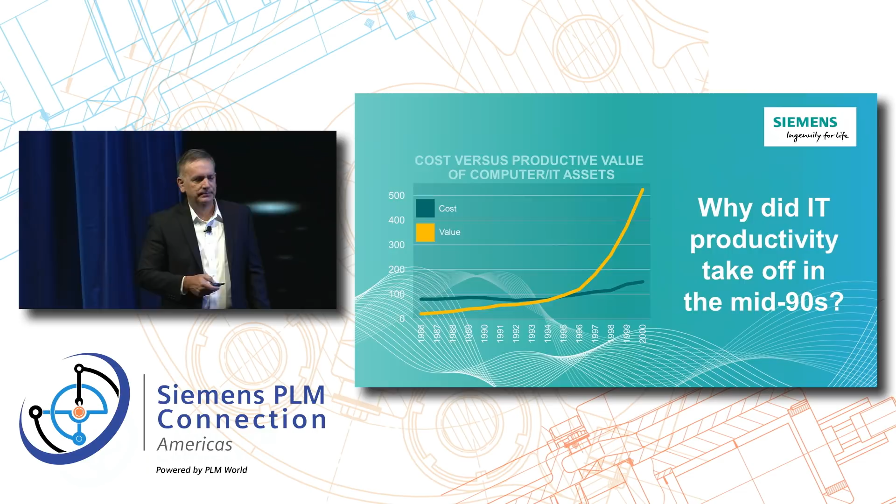We started to see the idea of what it takes to bring this technology to make a business, or make a difference in our business and the way we work. And if you think about it, it's not just computer technology. The same thing was true with electricity. Electricity really didn't take off until we built the power grid. Automobiles - cars really didn't transform in the way we think until we built the highway systems.

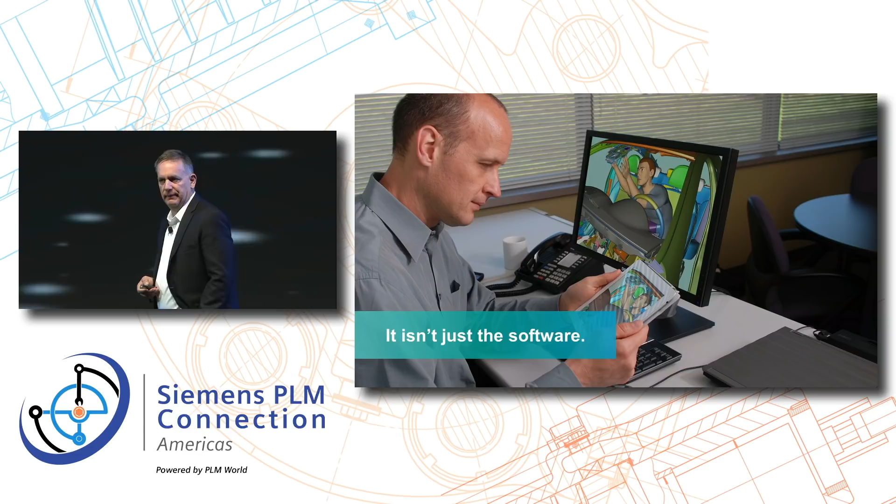So if you think about it, it wasn't just the light bulb, it was also the grid. It wasn't just the car, it was also the roads that make the difference. And I'm here today to say that it's not just the software, it's the integration and what's required to make all of this work. Because you've really got to think about how you put all the pieces together to get the true value out of this.

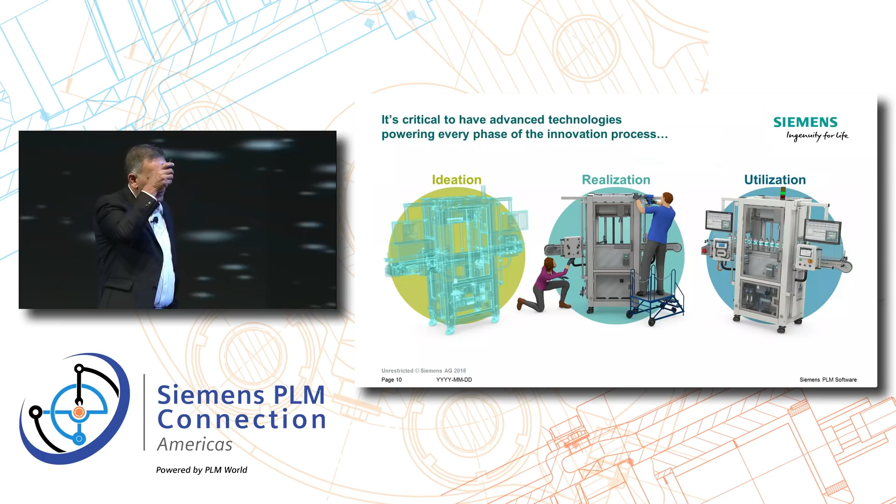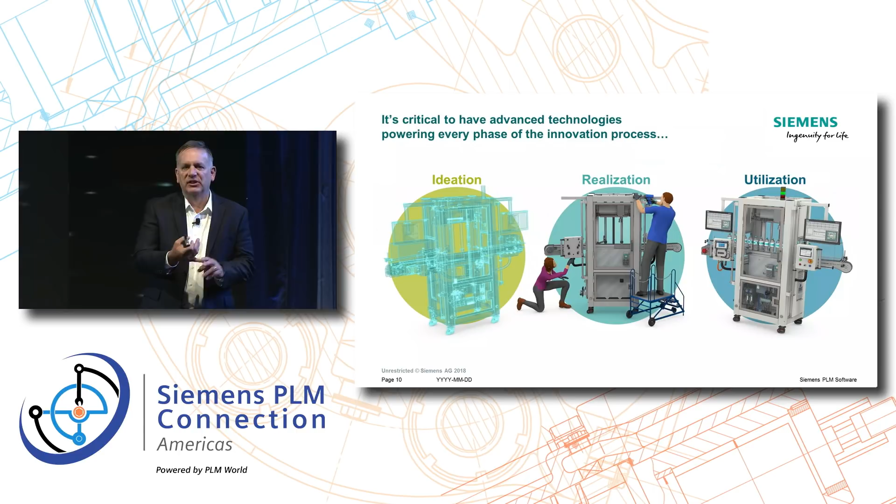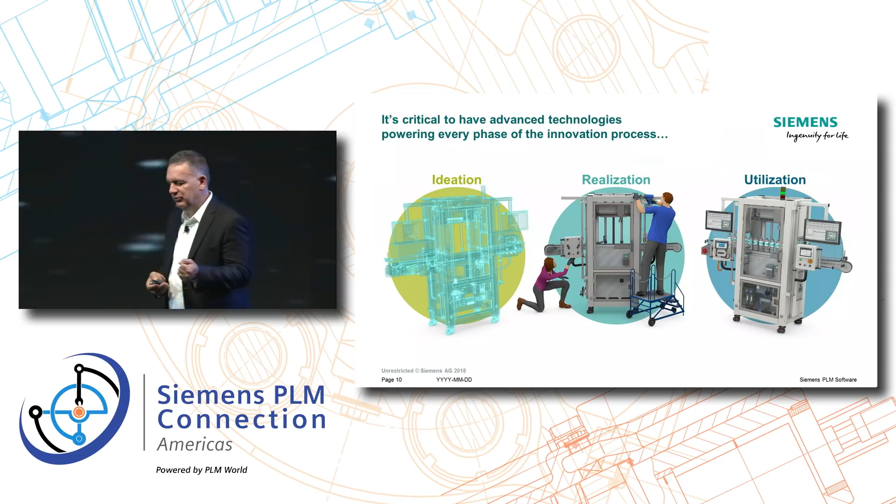And how we bring it together to make a difference in our business. And we believe one of those reasons is it's important to have a platform to build upon. Some of you have seen this before from us. I'll talk about it briefly, about what we describe as the platform. We've got this idea of ideation - it's the upfront phase of what we do, design, innovation, all of those types of things. Realization - you design it, somebody's got to manufacture and build it and produce it. And then we've got a utilization phase, which is the feedback, or how you work with the product that you've developed. And the value of that is when we start to think about putting it together into a single digital thread, and how you integrate these pieces together. This is what we work on so aggressively at Siemens, to make sure we can bring all these pieces together.

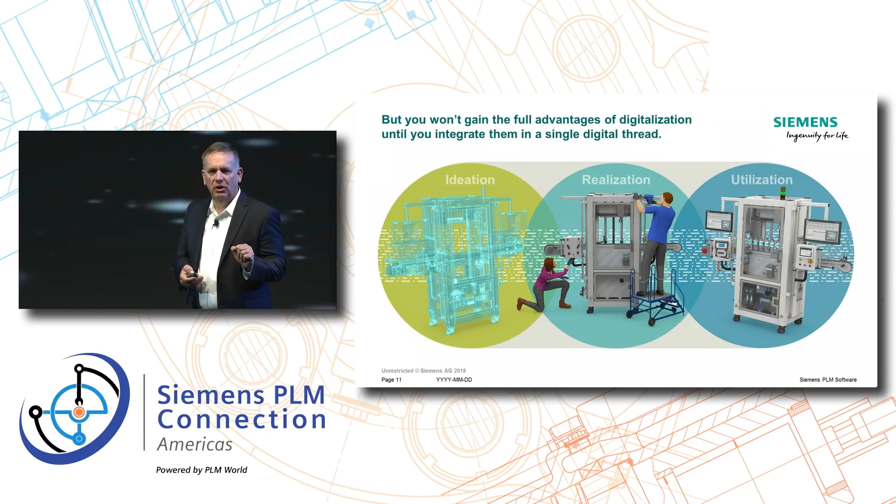Because when we think about it, you've got to be able to represent all three, particularly if you talk about a digital twin. If a digital twin only represents ideation, are you really going to get to where you need to be? Because again, you've got to manufacture these things. You've got to figure out what's happening with the product in the field. How do you use it? And so we think those are extremely important.

But the other part of the digital twin that's very valuable or necessary is to represent the multi-physics of the problem. I've got mechanical design, I've got electrical, I've got software. How do I bring all those pieces together?

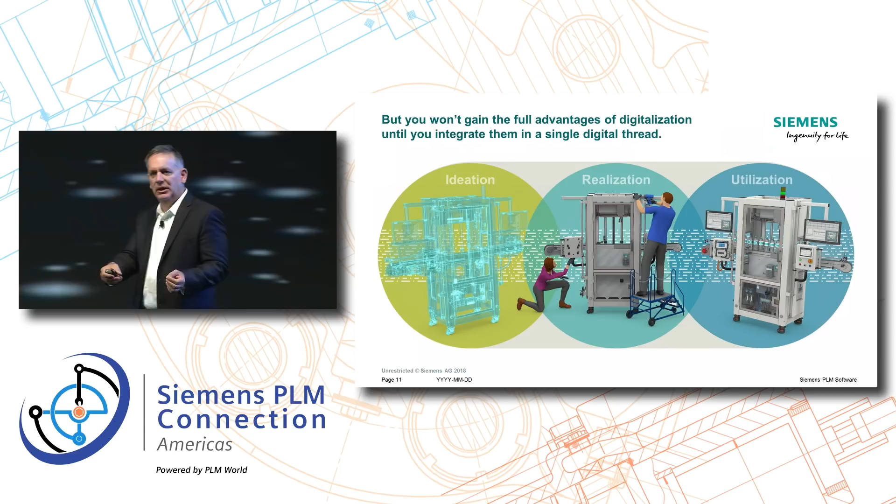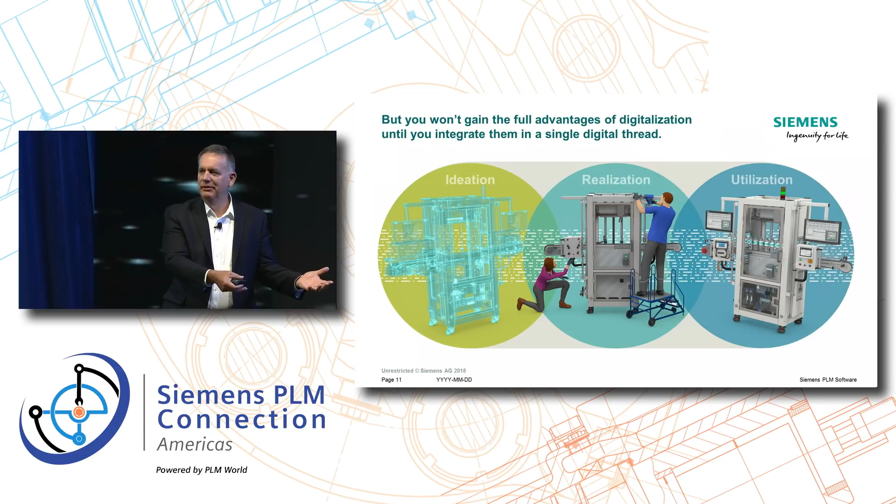Because the value of the digital twin is how closely the virtual world can represent the physical. So how can you possibly represent the physical if you can't even represent electronics in the product? Or if you can't think about how you're going to manufacture it? And so that's why we spend so much time trying to make sure that we've got a comprehensive digital twin.

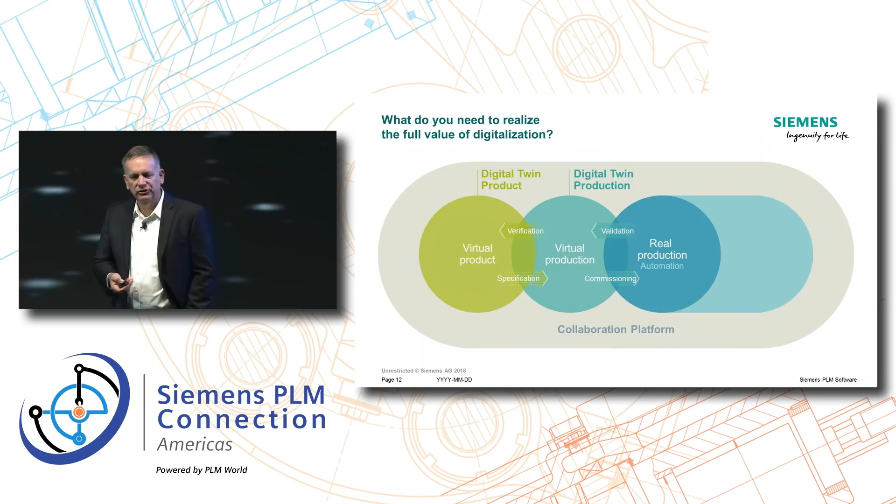And we think about that in a platform where we talk about the virtual product, production, real production, which is the automation running in the factory, and then the real product and the feedback loop back. With the feedback loop, we're saying, look, what do we learn from this product? How do we bring that back into the digital twin and understand what's happening so we can make changes to our design and the way we work as we go forward with our product set?

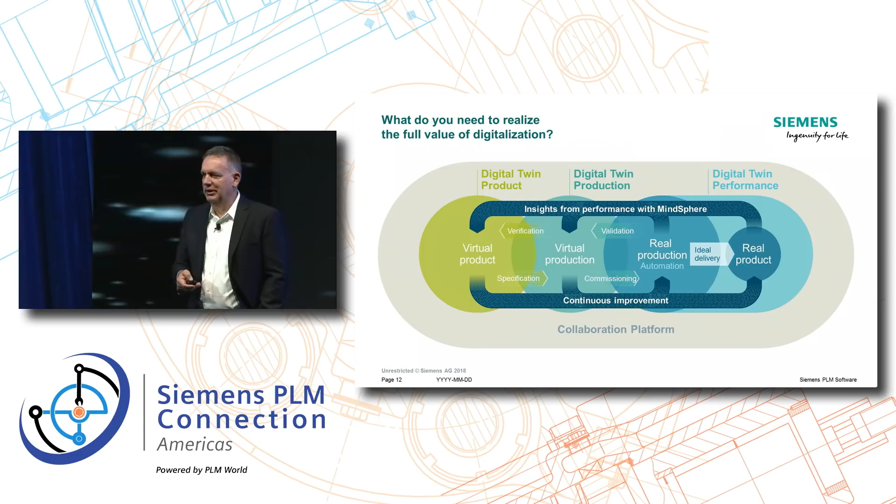So I thought I'd take a moment just to walk you through what we mean when we talk about this idea of an integrated solution. This is one example of where you could be.

Imagine you're in the truck business and you're losing market share. You're losing market share because your truck can't drive the same number of miles on a full tank of gas as the next truck. And so you're spending more time refueling. Marketing's coming back and saying, we've got to do something. Where are we at? And you really don't have time to redesign the entire truck. So you've got to think about how do I leverage the technology that I have today to quickly find a way to respond to this.

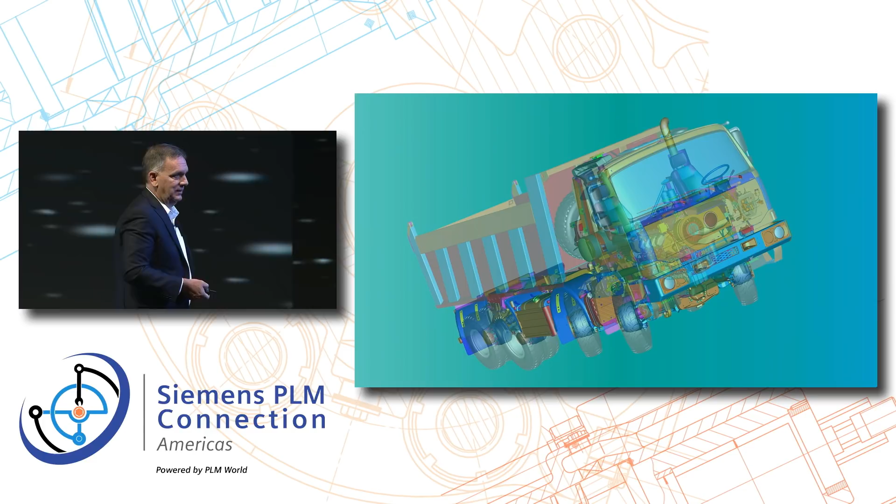So we look at extending the range, we look at our digital twin, and we say, well, what are some of the options I've got? One of the options might be a simple change - just change the size of the fuel tank, right? Because I can drive further because I've got more fuel. But what happens when I do that? Because it's a pretty complex system, right?

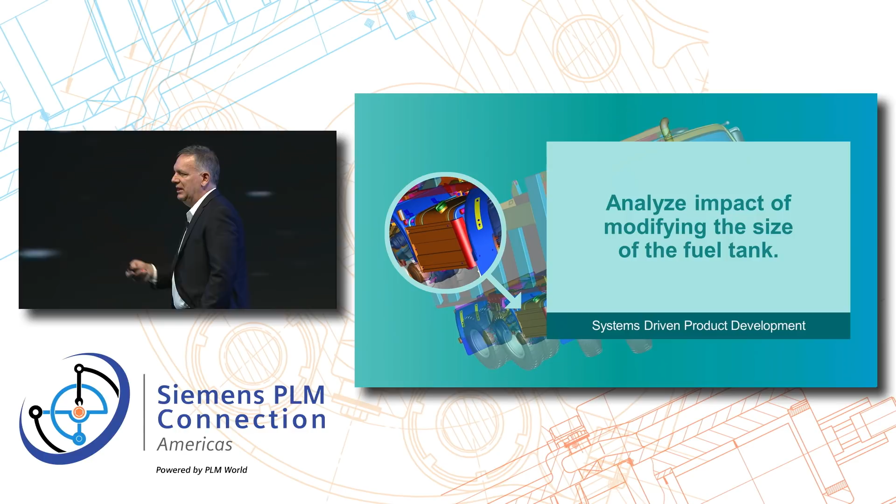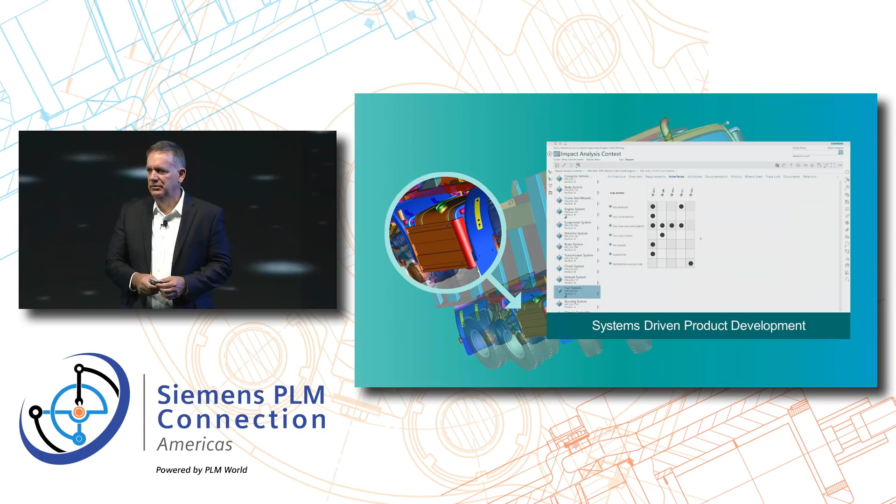If I want to analyze this, and I think about it through a systems-driven product development process, I want to start with that tank and then figure out what's all being impacted by the idea that I want to change this tank. So, in a systems model, I can go identify the tank and find everything associated with this. From this, I understand all the subsystems, the relationships, the requirements, everything associated with this design. So I can immediately understand what impact do I have in making this kind of a change.

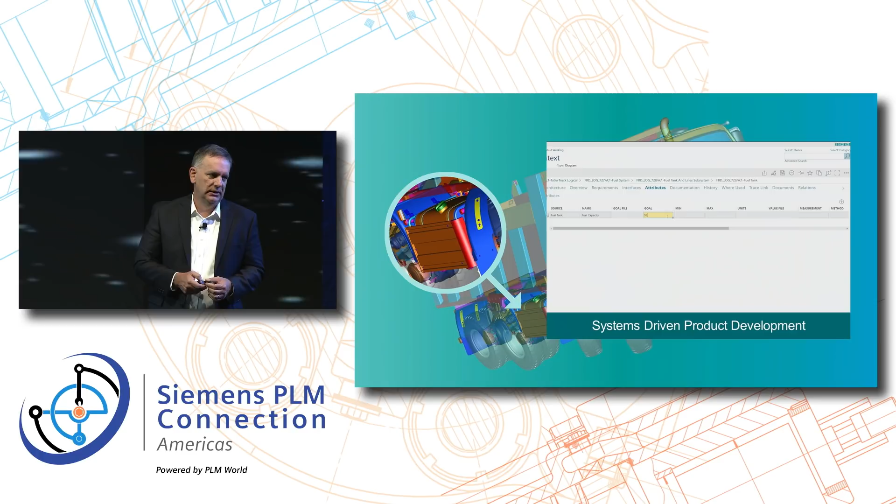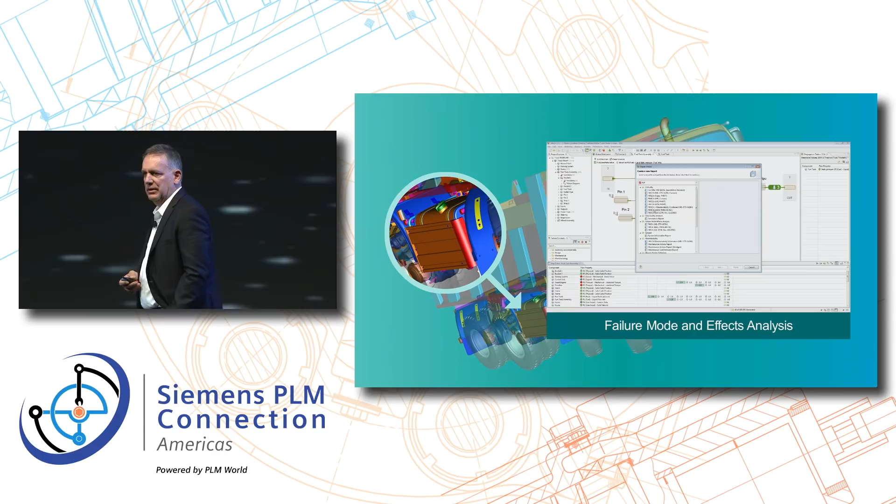And then from that, because I've designed this through a systems model, I can put in a failure mode and effect analysis that kind of takes place automatically. It'll come back and tell me and say, look, based on the systems model you've designed, 9 times out of 10, we're going to predict in advance that your brackets are going to fail because they can't carry the load.

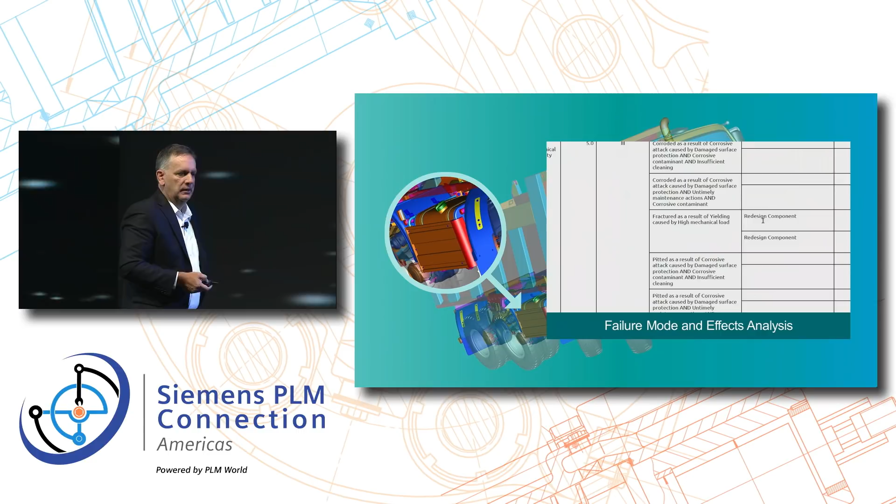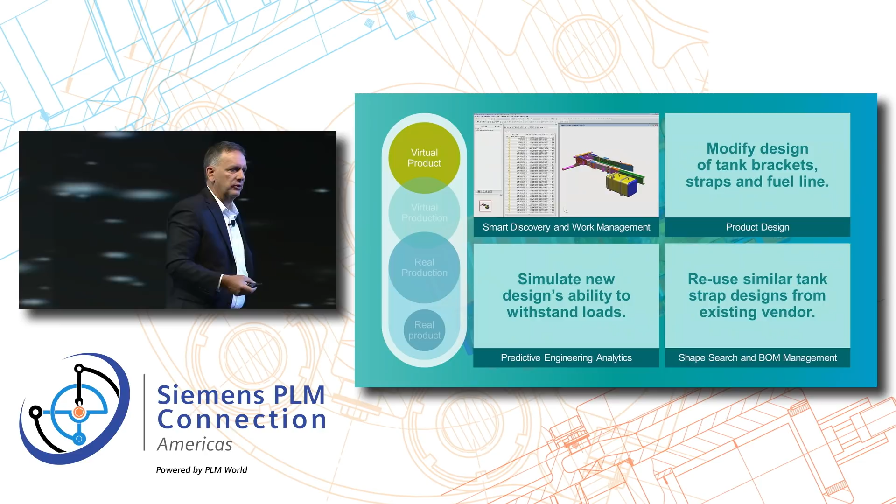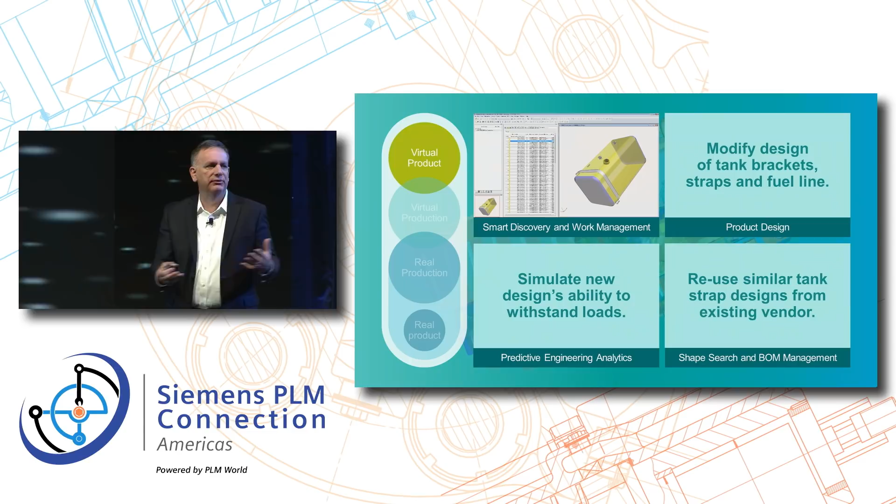From there then, we say, okay, well, what other things can we do? Well, first of all, using smart discovery, I can go in and identify this tank and say, I want to see everything associated with the fuel system, independent of what assemblies they're put in, independently of how everything's organized. I want to see the fuel system. Bring it to me so I can see what's going on. I want to see electrical. I want to see fuel. I want to see anything within a certain range of these components, regardless of how it's been organized in CAD and assemblies and so forth.

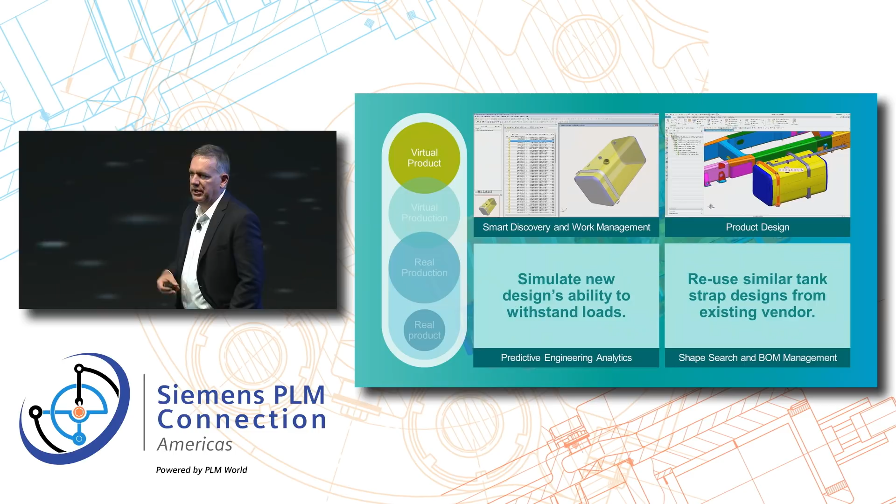And then, of course, I want to be able to do the design. You're going to hear a lot about what we're doing with NX over the next several days, and some of the things we're doing with convergent modeling and so forth that can change the way we think about design. From there, I take it into our CAE tools with Simcenter and really start to understand what kind of problems I might have from an analytical point of view when I change the size of this tank.

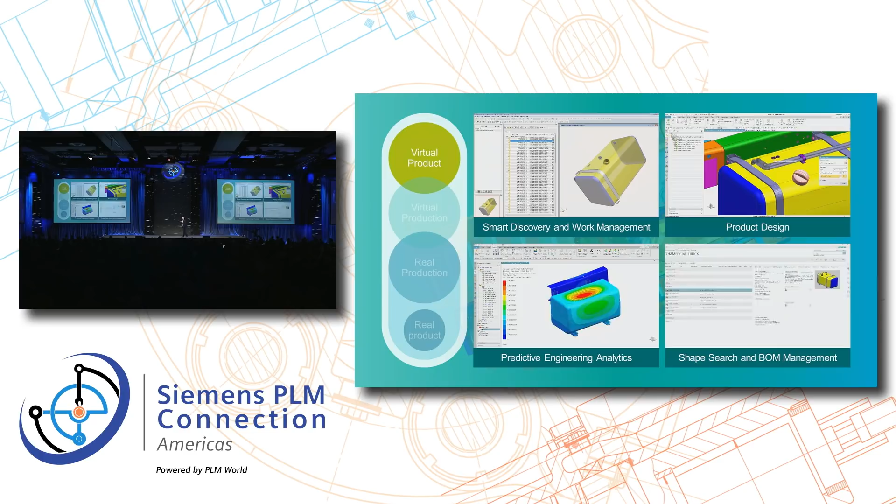I can use shape search to go out and say, well, look, if I've got to design new brackets, maybe I've already got some brackets that exist in the company that I could leverage, and I search by shape and bring them to me.

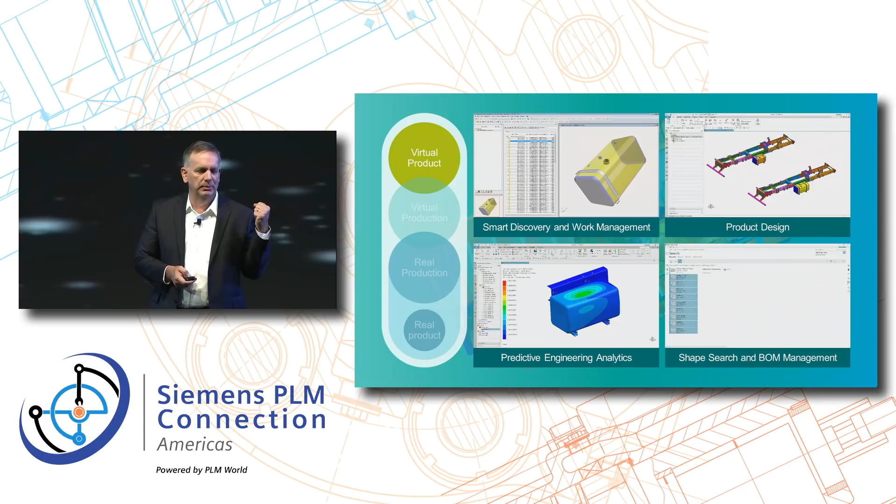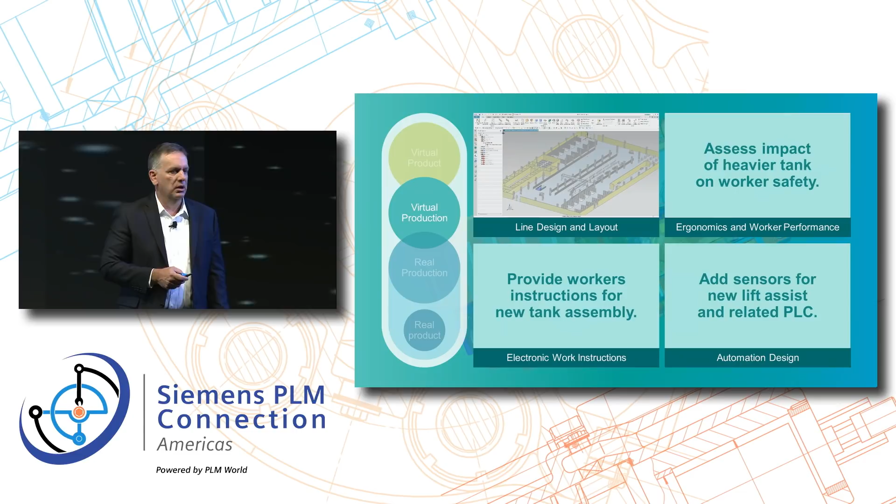If I change the tank, I've got to change the line layout of the factory as to where I'm doing the work, the assembly process. If the tank's heavier, what kind of ergonomic issues am I going to have when I put this together?

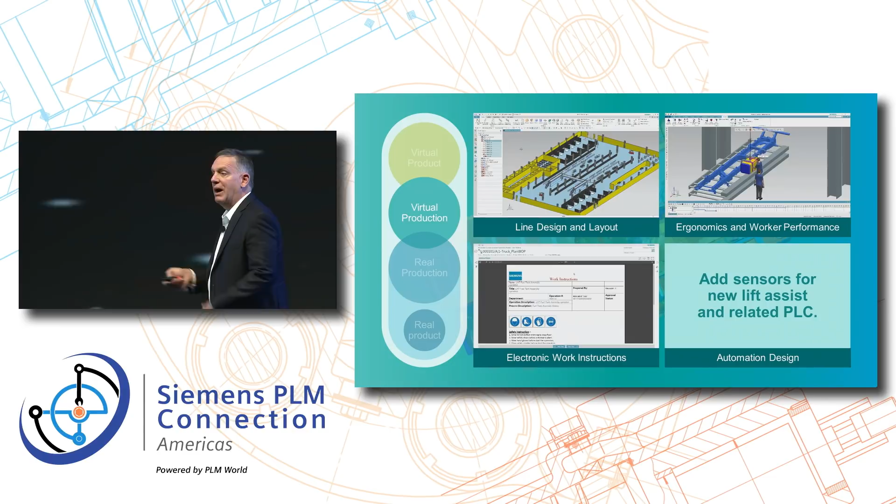From there, I've got to create electronic work instructions or modify the work instructions that are being put in place.

I've got factory automation running the plant. How do I automatically generate the PLC code from the definition of what I've designed for my factory, so I don't have to have this handoff and intervention in between? Automatically generate the PLC code.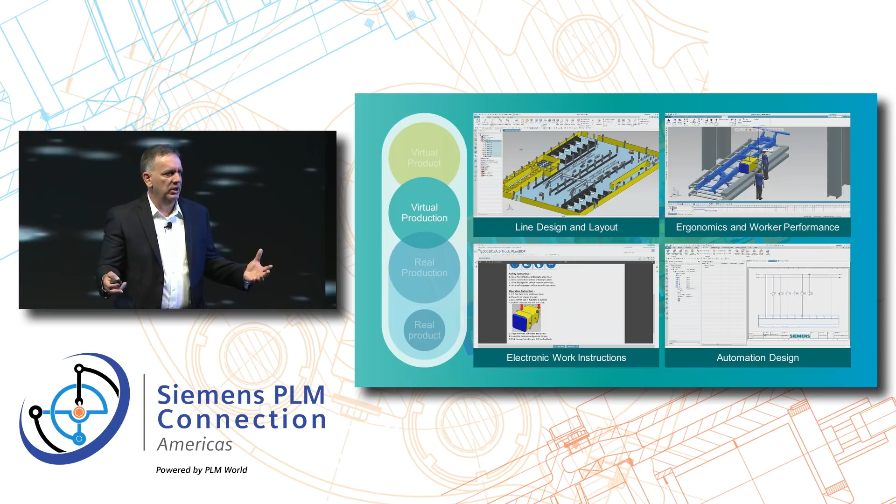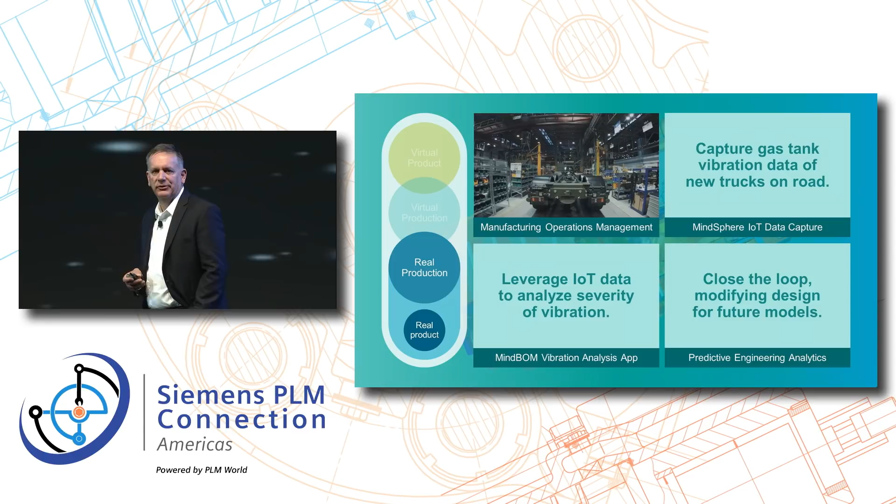And then I go into manufacturing operations management, implementing an MES, manufacturing execution system, to capture this.

Back to IoT with our MindSphere solution. I want to capture data on the prototype of this as I put it together, because maybe I'm starting to see a vibration problem in the tank, and I've got these trucks all over the world in prototype phase.

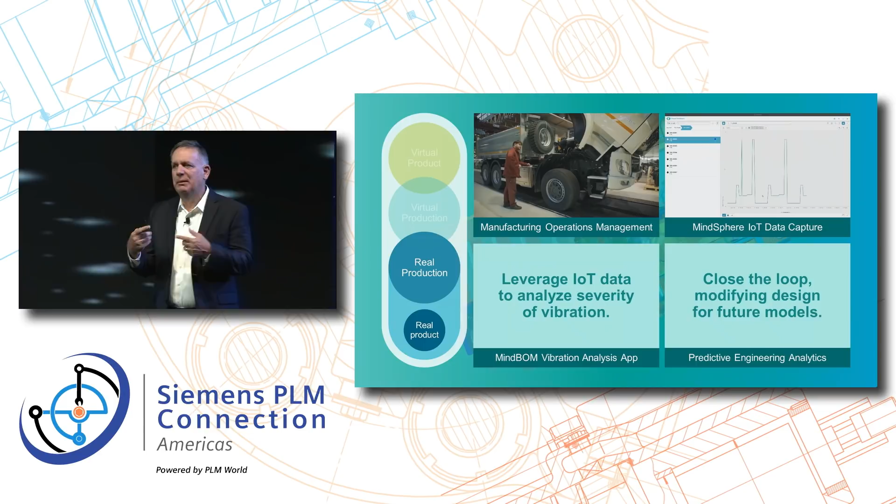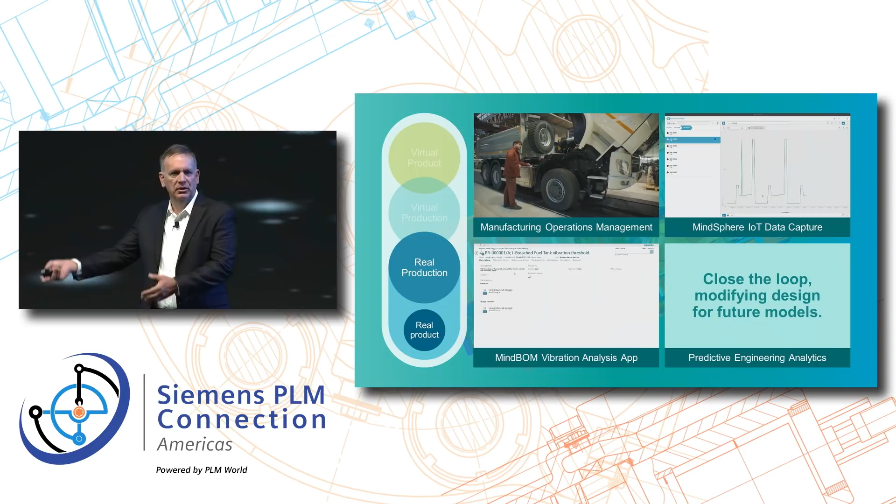I feed it back up, the sensors off of the truck to the cloud, take that data, and I take real data from the truck, load it back into our CAE tools, and actually run CAE against the real data, vibration data, to understand what's going on versus what I predicted and what's really happening with the truck through an IoT feedback loop. And then from there, I can close out the loop even further to start looking at predictive type of issues that I might be seeing when I develop this type of a product.

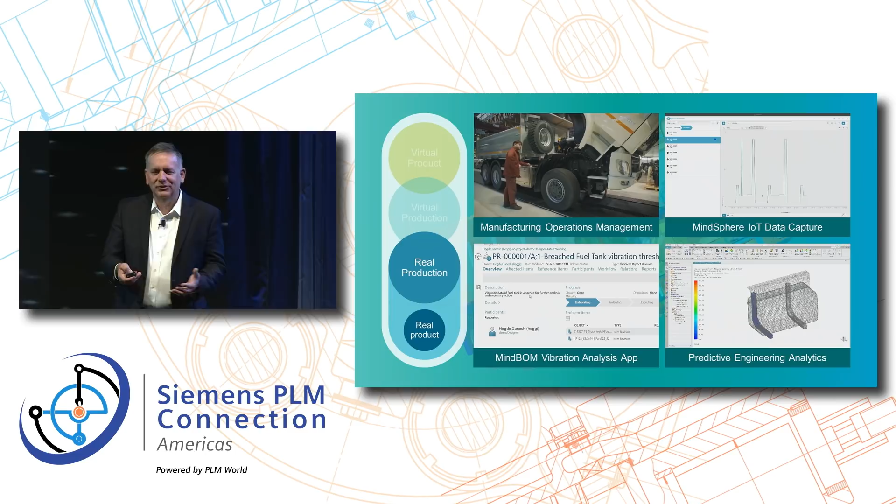So this is a small example of some of the things. We have many areas you could go into as to what an integrated solution looks like. But I'm here today to give you some examples of how customers are already using this technology, and it's making a big difference in the way they go about their design and manufacturing process.

Example here is Bugatti. Bugatti is, if you're not familiar, one of the fastest production cars you can buy today. Very expensive car, by the way. But one of the issues they had was, if you think about a car like this, weight and drag are very, very important to the specifications of this car.

One of the issues they dealt with was redesigning the spoiler on the back end. And the idea was, how do we take out some of the weight? How do we think about aerodynamics and so forth with the design of this product?

So they came to us and they said, look, how can you help us? And so the first thing was looking at what we do with NX, and the idea of specifying requirements to feed into a generative design process, an organic design of a shape.

From there then, if we get that shape, how do we manufacture it? Well, then we looked at what do we do with our additive manufacturing solution, leveraging composites in the design, using what we've been able to provide for some time now within our composite capability.

And then if I want to manufacture this and produce it through 3D printing, what I do with hybrid machining. Hybrid machining is interesting because every DMG Mori machine today that does hybrid machining ships with NX software, because they saw the value of how you could bring all this piece together.

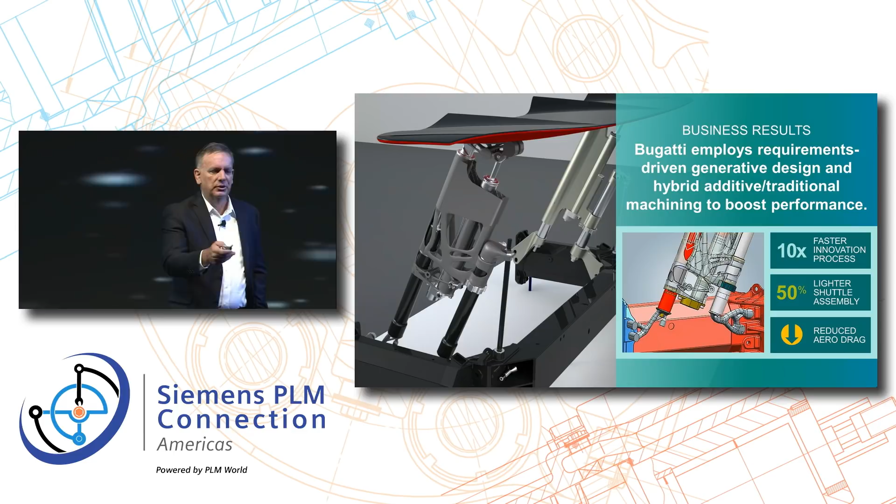If you see the picture on the left, you can see the traditional design of the bracket holding the spoiler up on the right, and then on the left you can see the kind of crazy looking shape. That shape is an organic design, part of it, the bottom half.

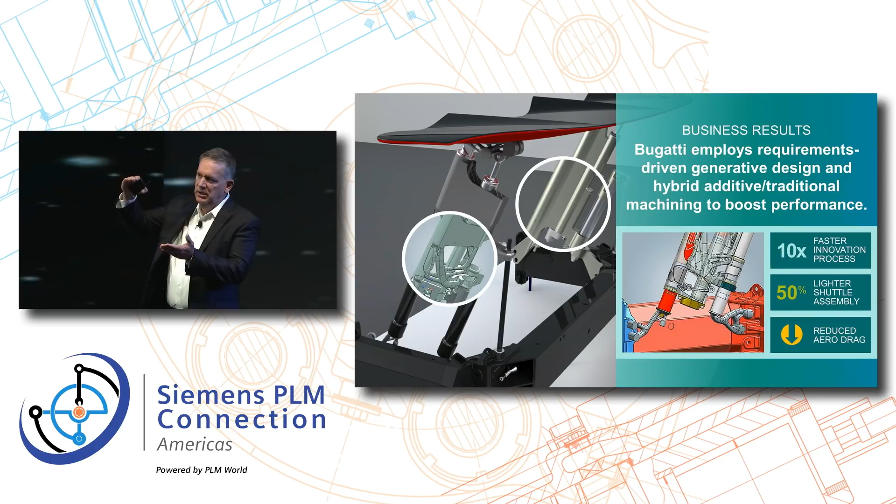The top half that sticks out of the vehicle as it's traveling down the road has very specific aerodynamic concerns that are modeled through our computational fluid dynamics solutions. But they wanted to integrate the idea of faceted geometry through generative design, which you'll hear about a little bit later today, with traditional modeling techniques to be able to design that bracket, something we did very easily with them.

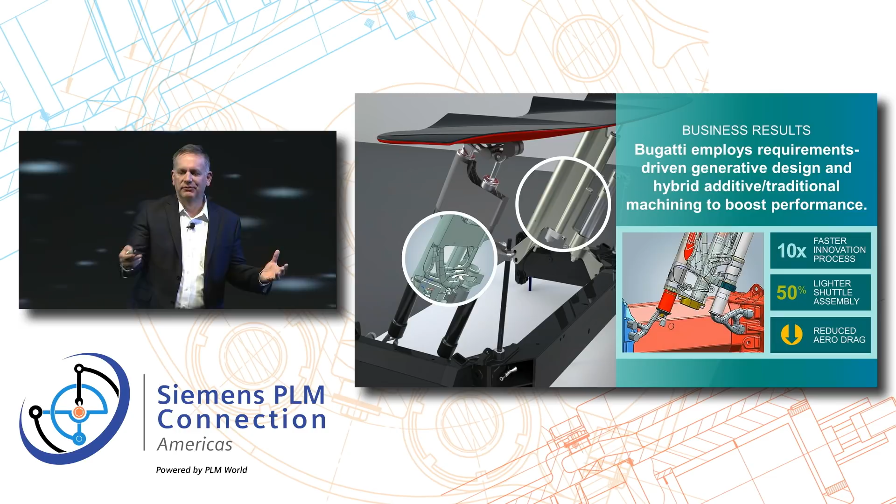And then the lower bracket is true organic design. You see the thing on the right, traditional design. We said, let the system design the software. In organic design, we give the loads, we give the constraints, we give keep out areas, and the software designs a part for us.

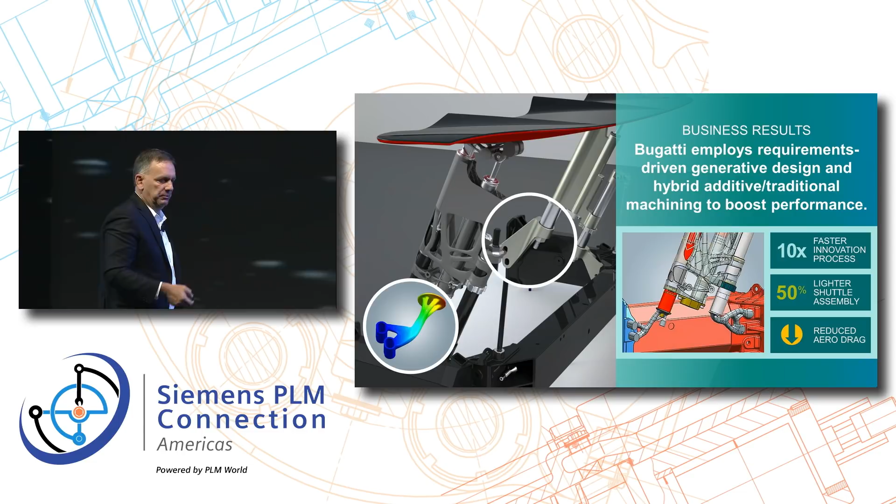And this is what they've leveraged to be able to reduce the weight to produce a solution that's 50% lighter than what they had before in their design process.

Now, think about the transportation business. It's estimated there's over $1.5 trillion in cost inefficiencies in transportation today. And what Hyperloop One is doing is trying to find a way to eliminate that. So it's not just about building the Hyperloop, it's about everything associated with the Hyperloop and how you would think about travel.

But these guys had a challenge. Their challenge was they had one year to come up with the prototype, and they only had 300 people. Because oftentimes when I'm up here talking, we talk about the big companies, lots of dollars, lots of R&D, and so forth. These guys did it with 300 people.

And what they did was they came to us and said, look, we need an integrated solution. We've got to take what we're doing with product design through NX. You've got to help us with computational fluid dynamics, and then how do we build a collaboration tool that we can go quickly with? Because even though we've got 300 people, we've got to do this within one year.

By putting the solution together, they did it in 9 months. 9 months, 300 people to make this solution work, to get the first prototype built. The first prototype was 387 kilometers per hour in test.

Again, you can achieve these types of things not by just throwing a bit of technology, but thinking about how do you put the solution together and how does it make a difference in the way you drive your business.

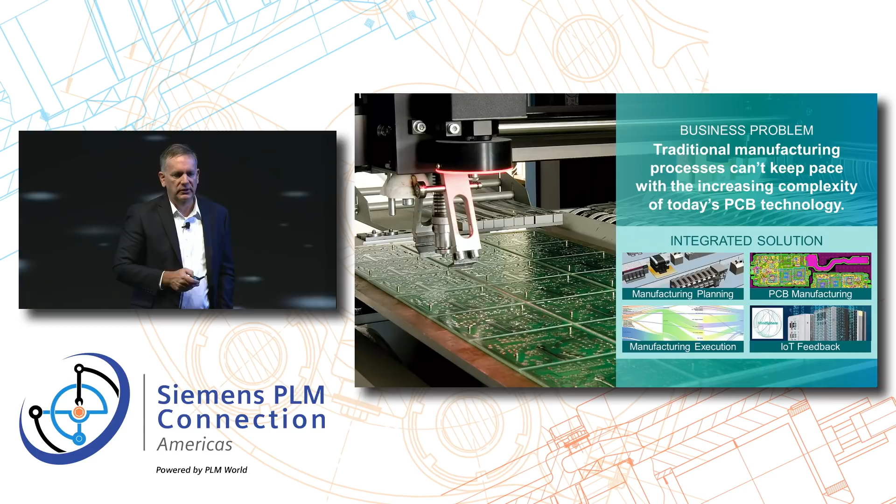But in this particular case, it's really about design for manufacturability. It's how do you think about integrating printed circuit board manufacturing with manufacturing execution systems and IoT to think about how I go about the design of this. And you'll hear more about this later today as well, as to how customers are leveraging this.

What we're seeing is that with the closed loop approach, where we can monitor and understand where we're having failure rates or machine maintenance or other types of things occurring, through IoT we can get a feedback loop and make a tremendous difference with faster setup, just-in-time materials, better vendor selection based on what we're seeing. These are the integration pieces you'll hear about a little bit later.

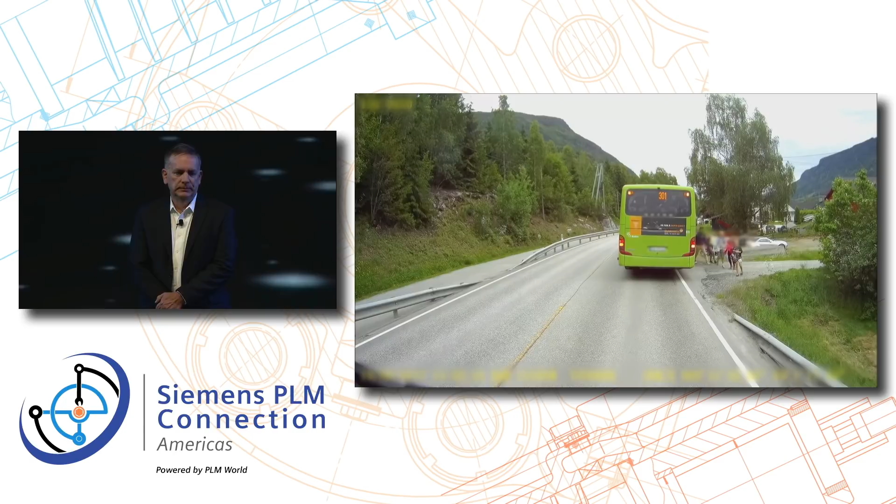Luckily, no one got hurt in that video. The reason no one got hurt is that for 2 years before that, Volvo Trucks was leveraging our PreScan software to make sure that emergency braking system acted and worked the way it was supposed to act. Hear a little bit about Volvo, what they're using.

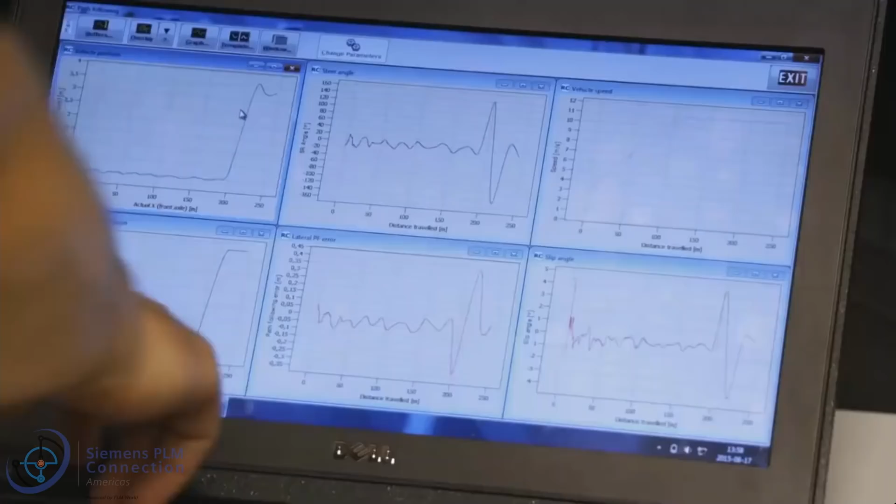As our active safety systems become more advanced, our test methods have to become more advanced too. What we do here is basically create any traffic scenario in the computer, and from the computer we get drive files that we then program our robots in the truck with, so that we can create the exact same scenario on the test track.

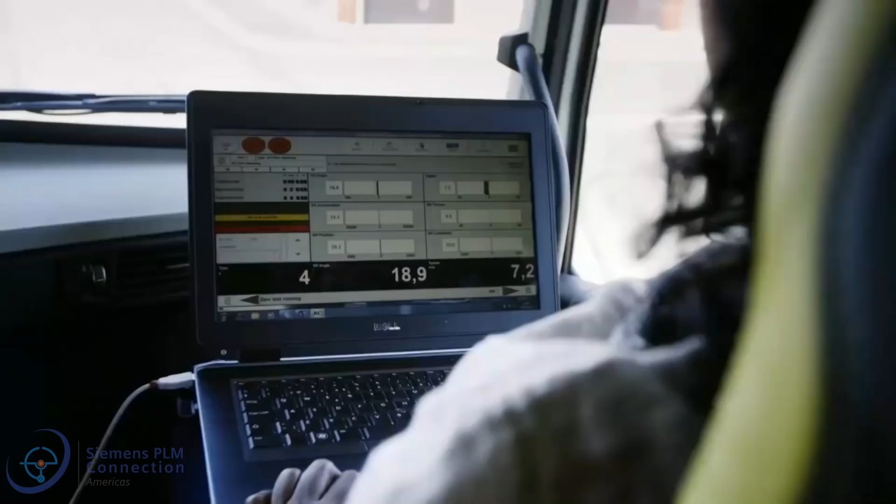The main components of the system are a main computer controlling all the systems, a steering robot, a robot controlling the acceleration pedal and the brake pedal, and a GPS unit that controls the location of the truck.

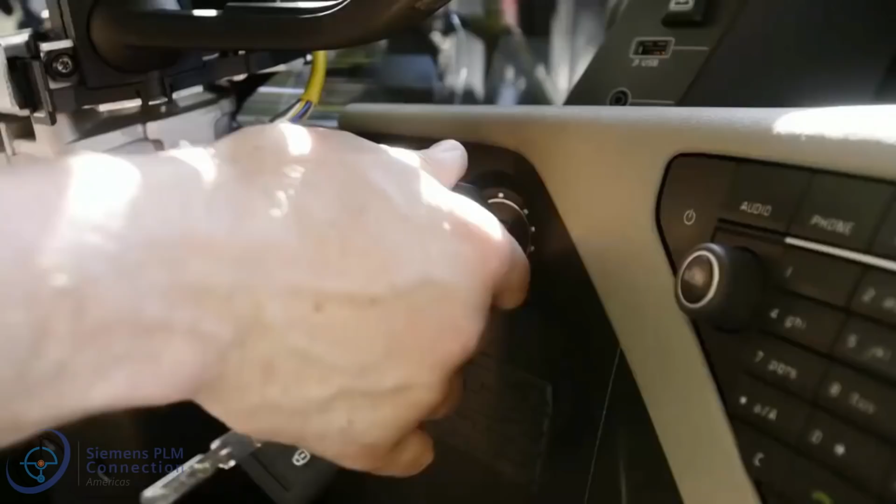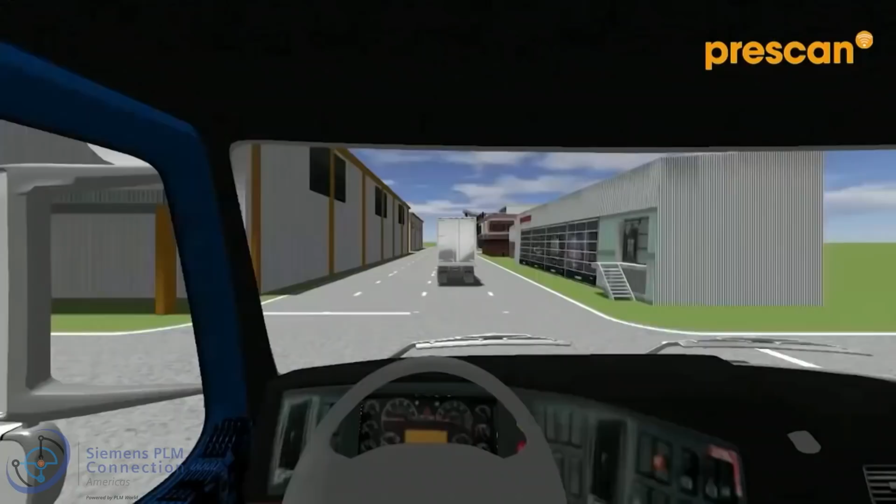Right, I'm here with Robert, so what's the deal now? What's about to happen? What we have done now is programmed the robot in this truck and a truck in front of us to do a scenario where we follow the truck in front of us, and then there will be an obstacle on the road, testing the emergency brake.

And the truck is driving all by itself? I'm not doing anything? No, what you should do is only hold this button here, the dead man grip, that activates the robot. If you release that, the robot will be deactivated. Everything is set, you can start the test.

The test will soon start. The reason why we do this is increased accuracy and repeatability - we can create the exact scenario that we had in the computer on the test track, and repeat the same scenario over and over again with the exact same outcome.

But also, if you want to vary a scenario - for instance change the speed or the distance between the vehicles - this is also very easy to do, because we just change a parameter in the computer file, and then program the robot and run a variation of the same scenario.

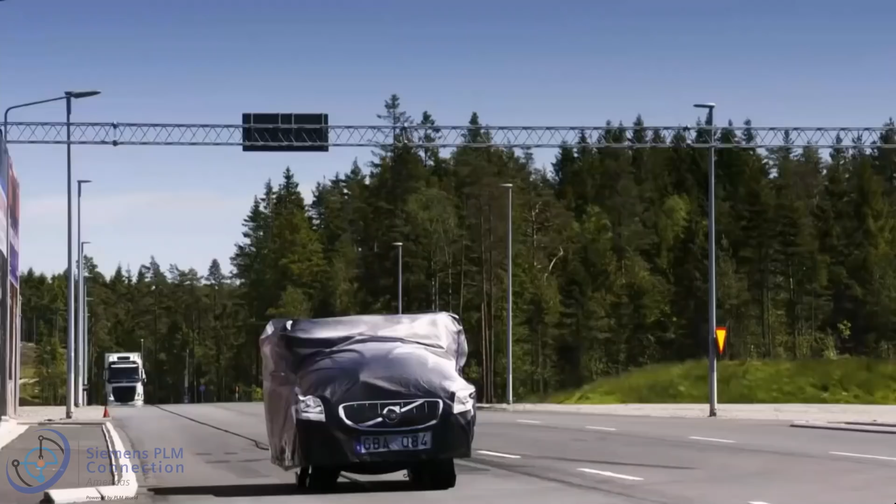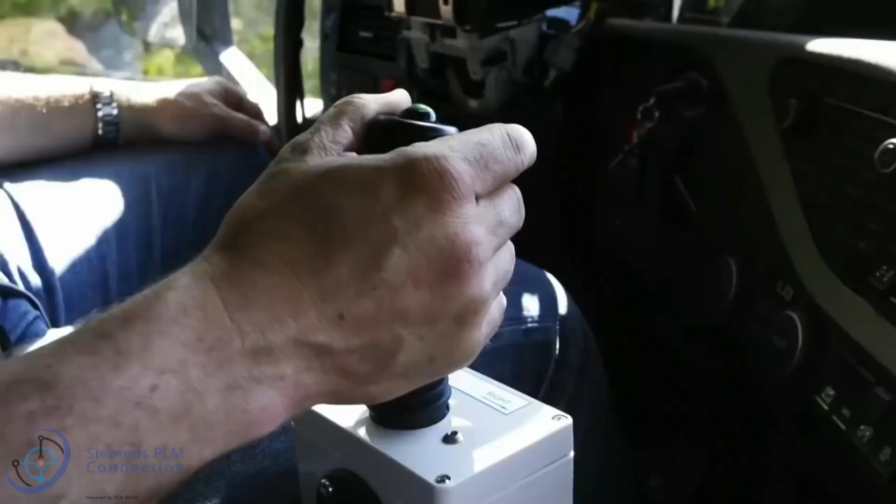Okay, I will start the test on the laptop, activate the robot here, and then you can just go slightly forward, and activate the robot. Yep, that's enough, now press this button. That's it? Yep. Test started. There we go.

It's a bit awkward, the steering wheel is turning. Now it will find the lane it should be located in, and just follow the truck in front of us. He's following the other robots.

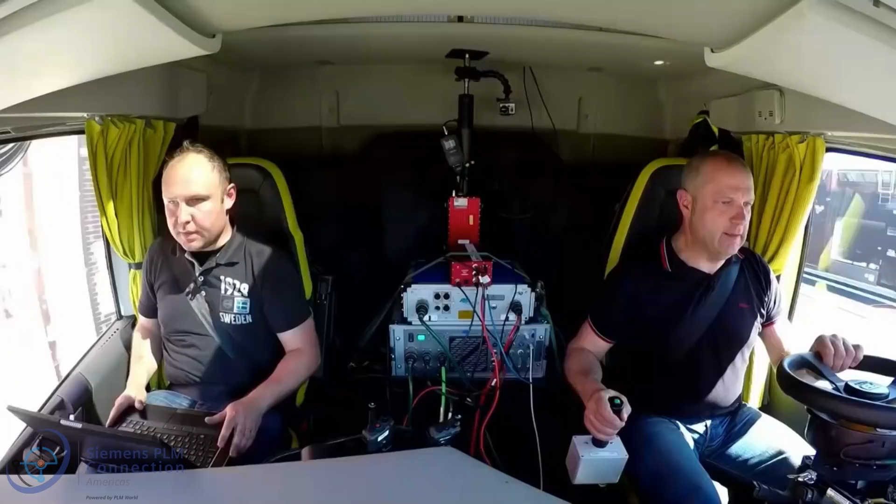So now that one turns out, heavily, and I will just hold tight. You can release the button. I released the button, yep.

It's estimated to get to Level 5, no steering wheel, complete driving of the vehicle - it's estimated by Toyota, for example, the president of Toyota, that it's going to require 8.8 billion miles of testing. Now, no one's going to drive 8.8 billion miles, right? So you've got to find a way to test and validate.

The PreScan software you just saw in the example with Volvo is all about verification and validation of the algorithms, software and solutions, to make sure the vehicle is going to act as you expect it to act. We looked at that.

We said we could combine that with HEEDS for design optimization, where you iterate through so many cycles, along with DRS 360, which is a sensor fusion capability within the vehicle. Sensor fusion is where, to be in Level 5, you can't have all the sensors around the vehicle making decisions on their own - they've got to come back to a central CPU to be able to move quickly and make decisions. We put those things together to provide an integrated solution.

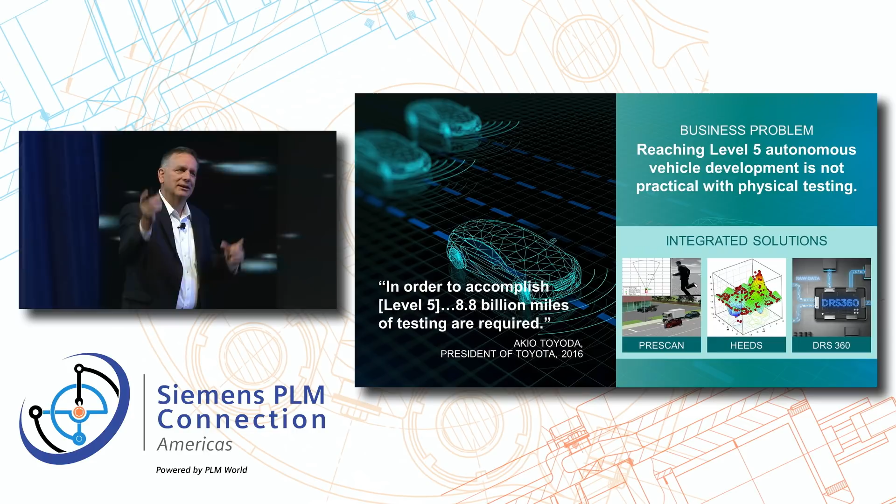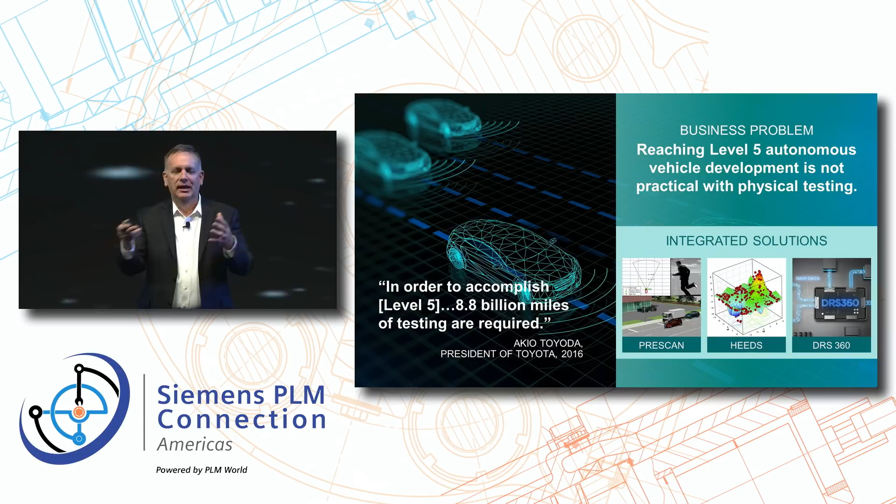Back to what we said earlier, it's not just throwing technology at it, it's putting the pieces together so we can solve the 8.8 billion miles of testing, to get to the level that allows us to have the trust that the thing's going to work the way you saw in the video previously for the stopping of the truck.

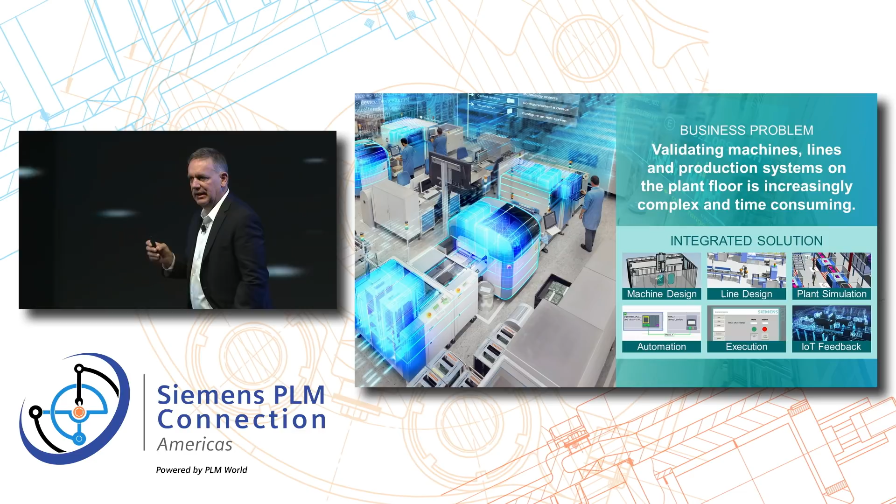In the area of factory automation, we've got a European automaker, for example, that had to validate the productivity and performance of their operations on the plant. The idea was, how do I link the machine design to the line design to plant simulation to automation to our execution systems to a feedback loop, bringing all those pieces together.

What they're seeing is by being able to do this with our virtual commissioning capability, where we automatically generate the PLC code that drives the PLCs, and we can validate all of this through software. They were able to take the process that took them 24 weeks to do down to 3.

So we talk a lot about disruption, and I've said before in events like this, in the area of disruption you really have two choices. You're either going to be the disruptor, or you're going to be the person that responds to disruption very quickly. And you've got to have the solutions to be able to do that. When someone's doing something 24 weeks versus 3, it's not long before disruption starts to occur.

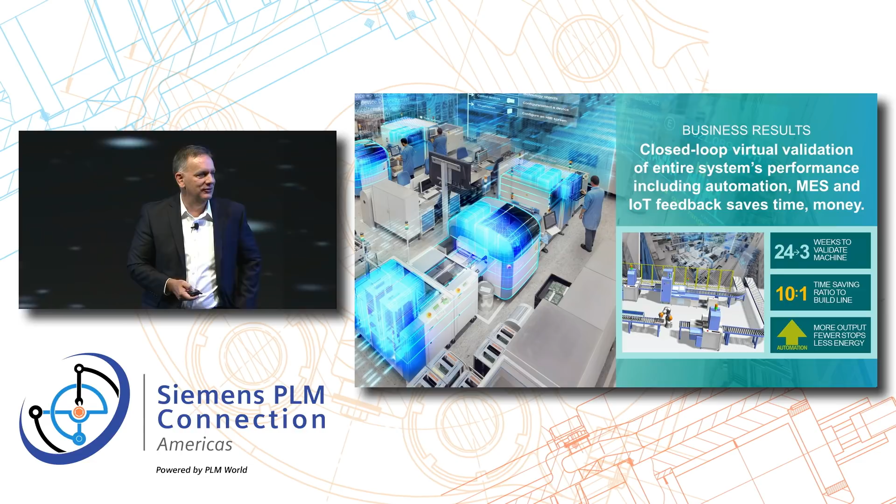And that's why I think there's so much interest in the solutions that we provide through our digitalization piece, because it starts to make a tremendous business impact when you think about how you work.

And then finally, in the area of IoT, we've got a heavy equipment manufacturer that has the same thing, physical prototypes out in the field. How do you gather all the data? By putting the sensors in place, IoT monitoring, our 1D simulation tools, collaboration tools, 3D simulation, and having a feedback loop so that when you have the product in the field and you reach an overload condition, or a vibration problem or whatever, you can get the digital twin feedback loop back to the product.

And I would argue that Siemens is the only one that can bring that data back and leverage it in a comprehensive way to the digital twin.

There's a lot of discussion about IoT, and IoT is really, there's a lot of work in the idea of preventive maintenance, condition monitoring, all those types of things. That's extremely important. We at Siemens do that very well because many of the factories around the world have our equipment and we're already doing that.

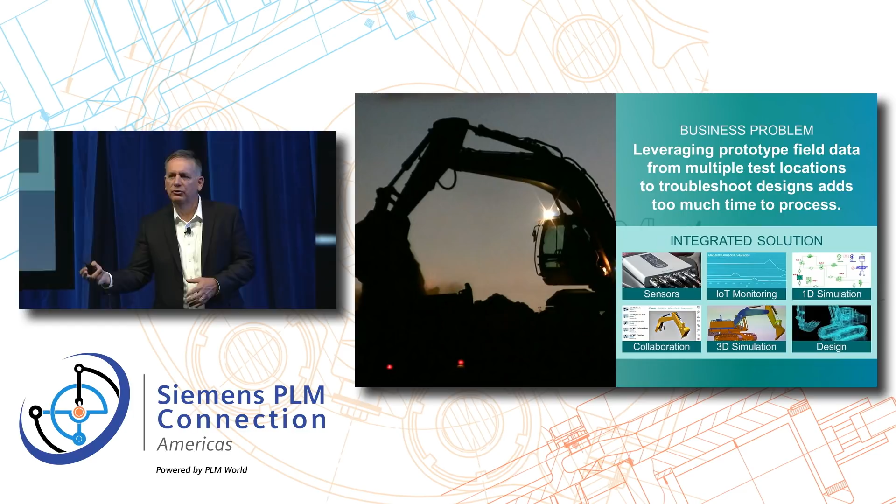But we also took the same IoT piece to be able to leverage the feedback loop so that you can bring it back to the digital twin and validate and verify and actually change the design. Rather than just telling me I might have a problem, I've got a heat condition or a vibration problem, I can use the data to bring it back and make a change to the design as I go forward.

And so in their case, they're seeing 40% reduction in test time, 20% cost savings. Again, very valuable feedback on this.

So what does it take to make all of this happen? Well, this is what we talk about with a platform, our digital innovation platform. We bring all these pieces together to be able to put an integrated solution together to provide the solutions. Yes, we're still open, we still work with any other piece of software, but the most value comes when we start putting pieces together to solve the problems, like you've seen through some of the examples that I've had.

We did this starting back in 2007, where Siemens as a whole has invested since then over $10 billion into the software space. Most recently, as you know, the acquisition of Mentor. We have TASS for the PreScan software, which you saw in autonomous vehicle. We've done 3 more acquisitions since then, 2 of those in the integrated circuit space, 1 in motor design. So we've got a lot of areas where we continue to acquire and build out so that we can better build that relationship between the physical and the virtual world, so we have a more comprehensive coverage as to what we're doing.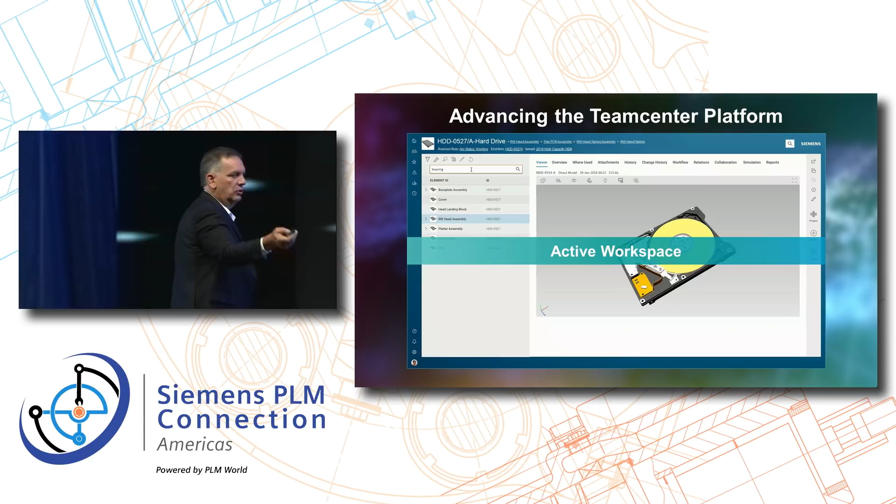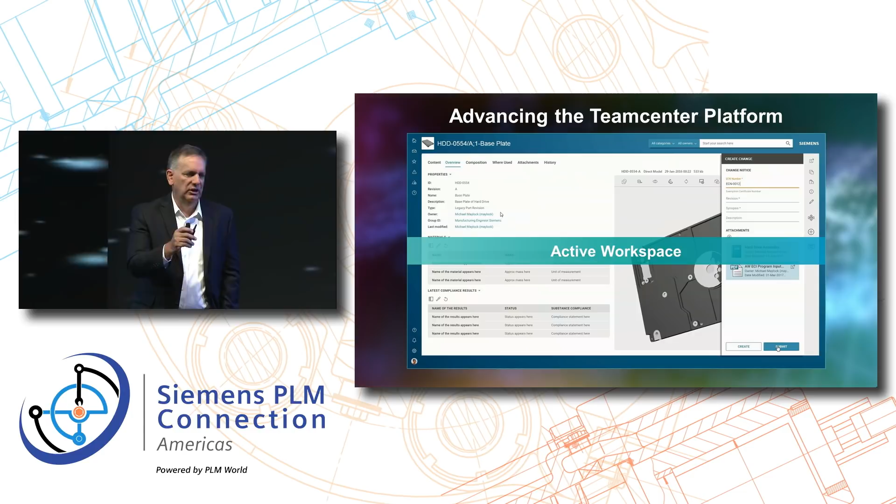So some of the things we're working on, and hopefully you get to see today, is in the area of Teamcenter. We looked at the UI, the response, and we're tweaking it one more time, making it much easier and more interactive. You'll see this as you go through the sessions this week. We've had a tremendous response to the change of the UI, making it much easier to use.

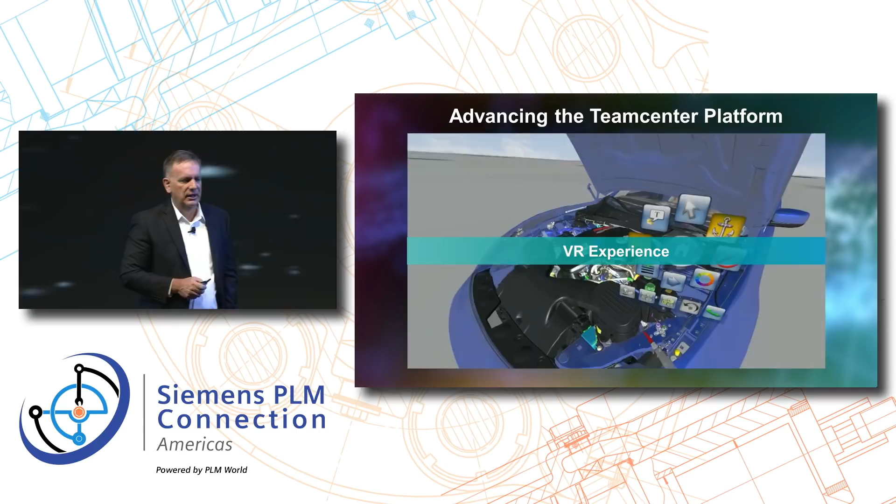In the area of virtual reality, we've done a lot of work here to leverage low-cost VR devices, so it's not this big expensive thing you have to think about. Really, it's using the data as it is today, the way it's been prepped. You don't need to have data prepped. You can use it as is, and it's one button push, and I'm right into VR.

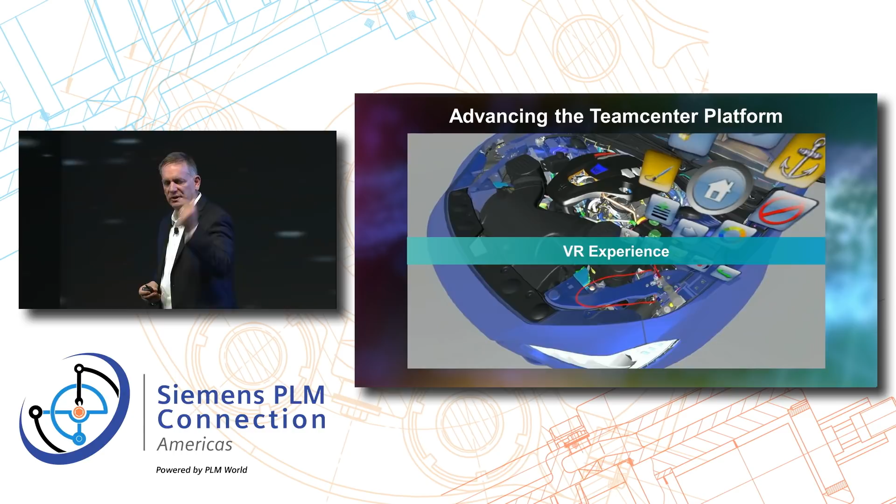Coming a little bit later this year, you'll see integrations of Teamcenter to Slack and Microsoft Teams to promote the idea of better collaboration. We'll also talk to you a little bit about what we're doing with this idea of a systems model, identifying the component, seeing everything related to it, and how I get to the components that are there.

Artificial intelligence, how do we take advantage of that, and think about how we work? We've got things we're doing with part classification. One of the hardest things with part classification is somebody's got to go enter the data, and most times people don't want to do it. So if we combine shape search with parts classification, we think we can make a big difference, similar to what you saw before with JCB. Teamcenter is leveraging AI to automate that process, so you don't have to go through and put all the data in. We learn, we understand, and we're able to modify how we bring in data. You'll see more and more of that from us.

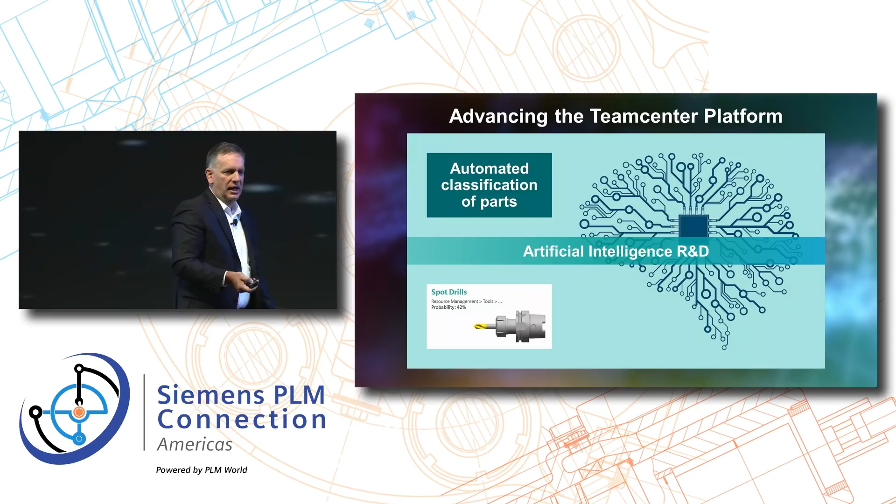In the area of multi-site, expanding and moving data around the world, our next release will be 10 times faster than what we've previously done in moving data for collaboration. So a lot of great things there.

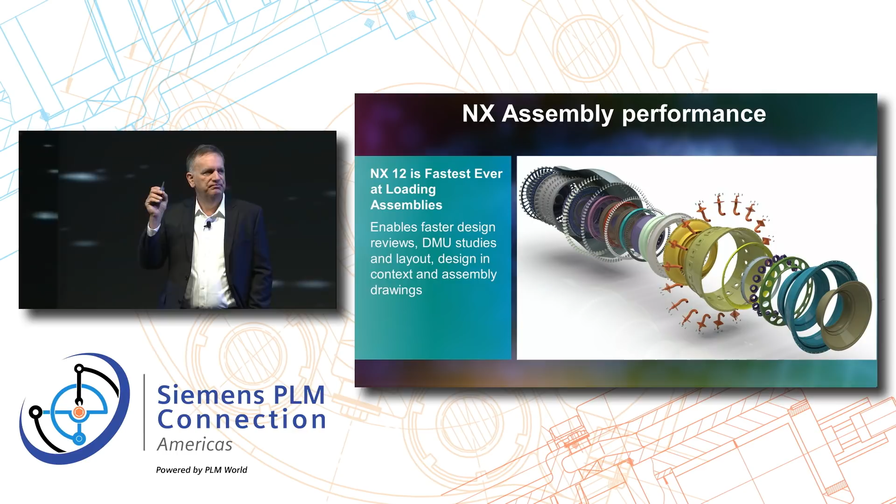In NX, you're going to see a lot about what we're doing with assembly load and performance. In NX 12, we think we've got the best assembly load times of any product in the business when it comes to large assemblies.

We've got, I think our headline is wrong there. We've got the idea of integration that we did with Mentor Graphics, the ability to bring together Expedition, Capital, and NX all into one tool set. You'll see the first examples of some of that this week.

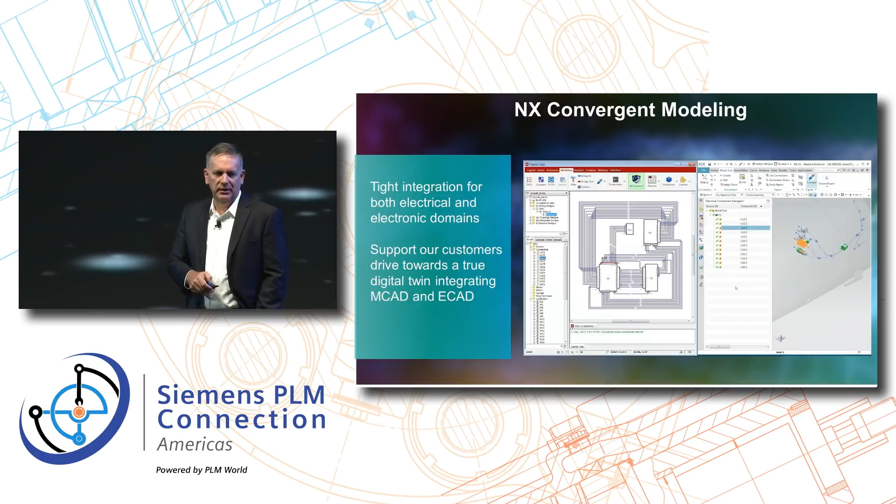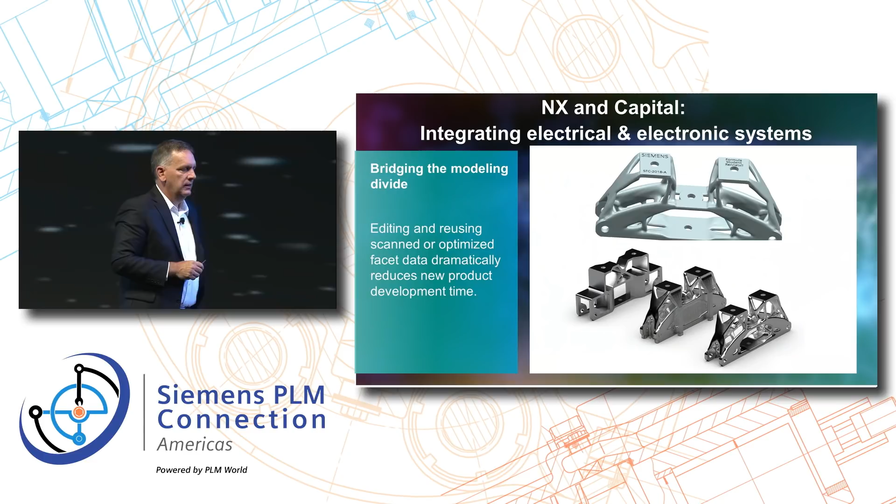We've got the idea of what we're doing with convergent modeling, right? This is leveraging the idea of using facets in the design and generative design. We'll spend some time talking about that with you.

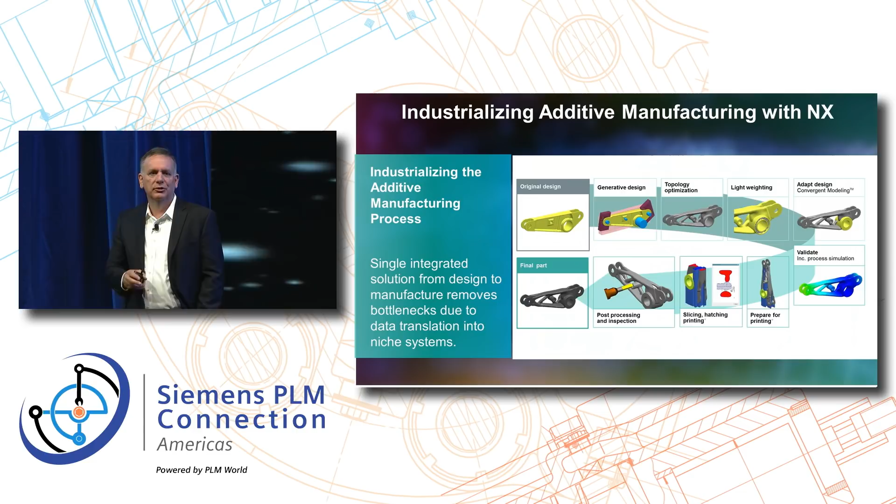And then the idea of what we really talk about when we speak to additive manufacturing. Additive, I would argue, most people can model and print a part. That's not what additive is about. Additive is about how you industrialize the process, and you've got to think about all phases of this process to get the true value out of it. So if you're thinking about what's happening in additive, you really need to spend some time with us, because we have a very different solution than just model and print. It's looking at the problem holistically as we think about this.

So with that, I just want to say thank you for being here. We've got a lot to show you, and I truly believe we can make a big difference to how you address innovation in your company. Thank you very much.